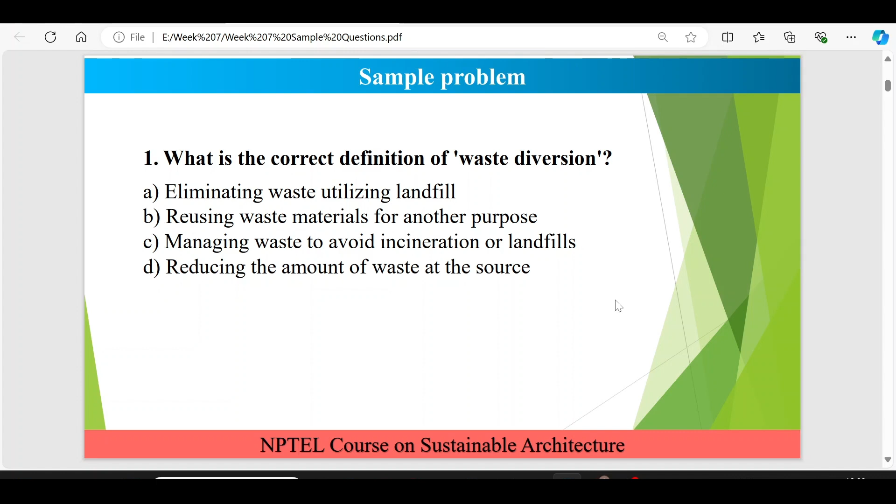Can we move to question number two now? Yes, sir. Here is question number two for all of you: as per the TERI report, by 2047, the waste generation in India is estimated to exceed by how much?

260 million tons per year. Alina is saying 260 million tons per year. Let me note the answers of other students also. Sasidhar is also agreeing with option C. What about others? Try to participate in this problem solving session and give your valuable input in the chat box, whatever answer you think is the most suitable for this question.

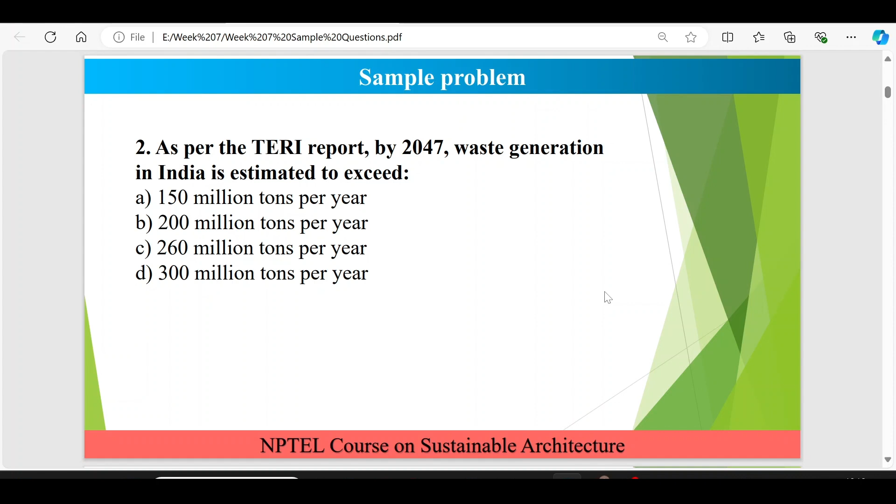Here is question number 3 for all of you: which type of waste is not biodegradable? Out of the four options given to you - food waste, garden trimmings, glass, organic waste - which waste is not biodegradable?

Option C, all of you are absolutely right. Glass is an example of a non-biodegradable material, which means it cannot decompose naturally, or it remains in the environment for a longer time as compared to all other options. So let's move to question number 4.

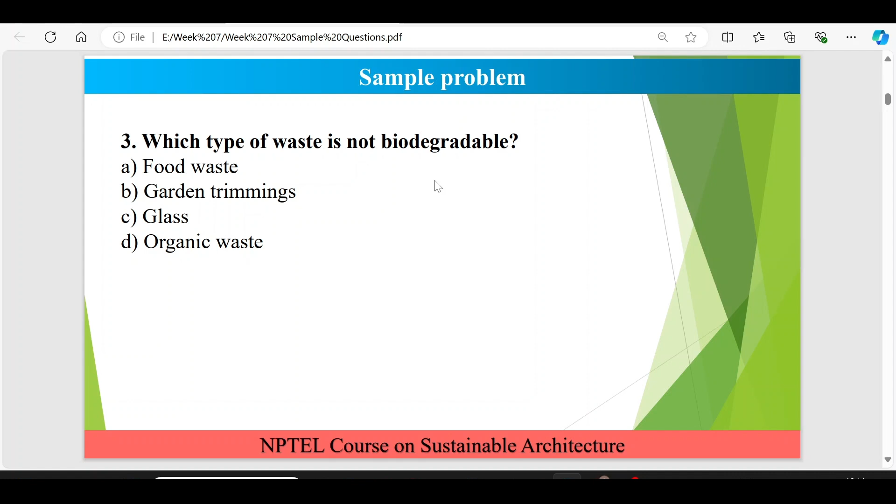Here is question number 4 for all of you: waste disposal involves recycling materials for further use. This statement is true or false? False.

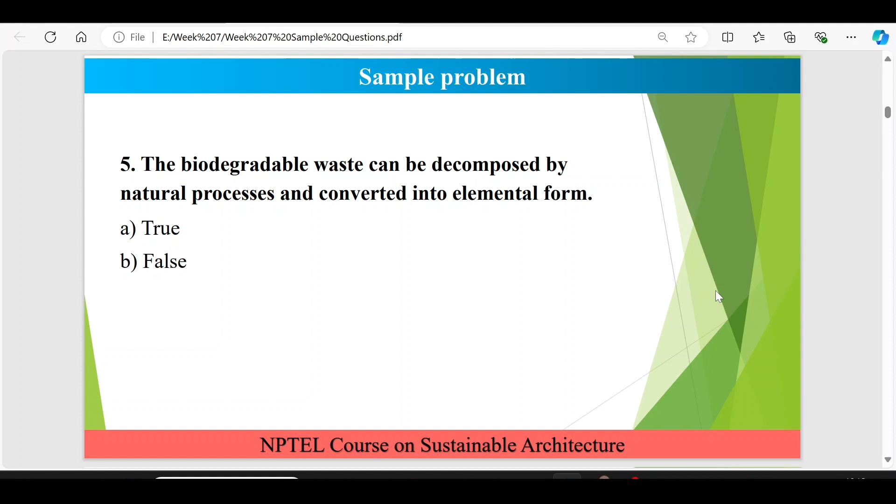Without wasting much of our time, let's move to question number 6 and see how many of you can give answer. Combustible rubbish includes items like metals and glass, true or false? All of you try to participate and give your answers based on the understanding of lecture 31, slide number 7.

Option B, false. How many of you have given answer? Let me see. So most of you have already answered. Option B false is the right answer because combustible rubbish refers to materials that can be burnt, such as paper, cardboard, or clothes, while the metals or glasses stated in the statement are non-combustible materials. That's why it is false.

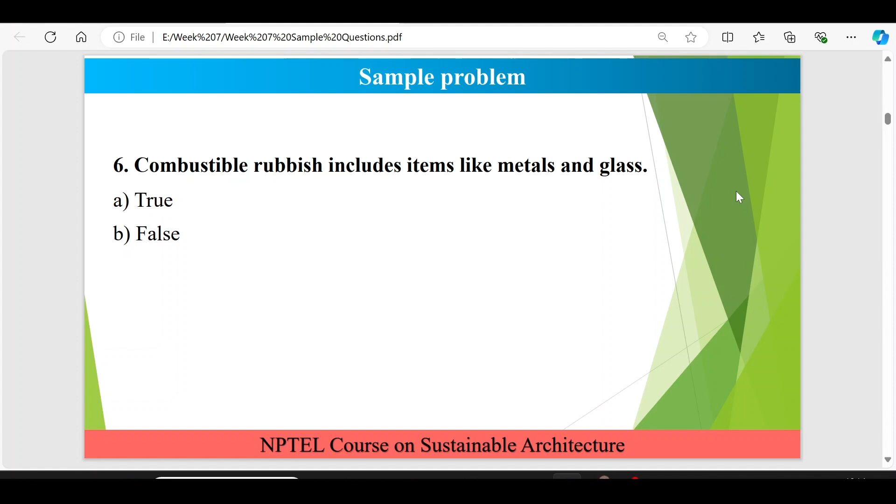All of you are absolutely correct. Let's move to the next question. Question number 7. How much energy is required when recycling aluminum compared to producing virgin material? Is it 50%, 75%, 90 to 95%, or 5 to 10%? I think 5 to 10%.

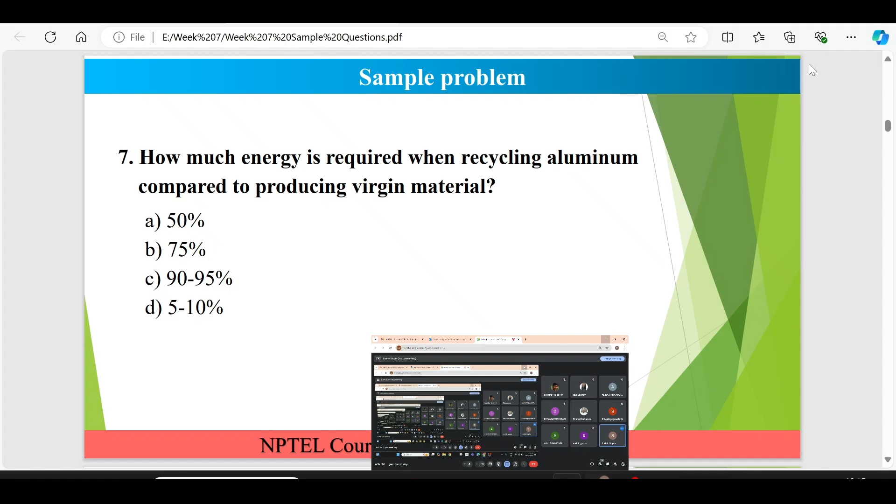Okay, all of you give your answers based on the understanding of lecture 31, then I will discuss the answer. So most of you have given option D. Option D is the right answer: recycling of aluminum requires only 5 to 10% of the energy needed to produce new or virgin aluminum material, highlighting the significant energy savings through recycling of aluminum. Is it clear to all of you now?

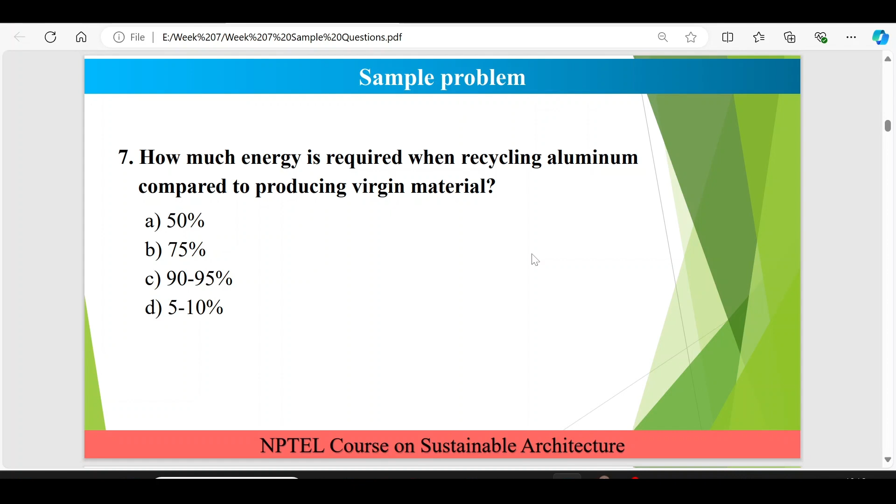Yes, sir. Okay, then let's move to the next question. Question number 8. What is the approximate percentage of India's total landfill waste generated by the metro cities? 17%, or 37%. You can answer based on the understanding of slide number 13 of lecture 31.

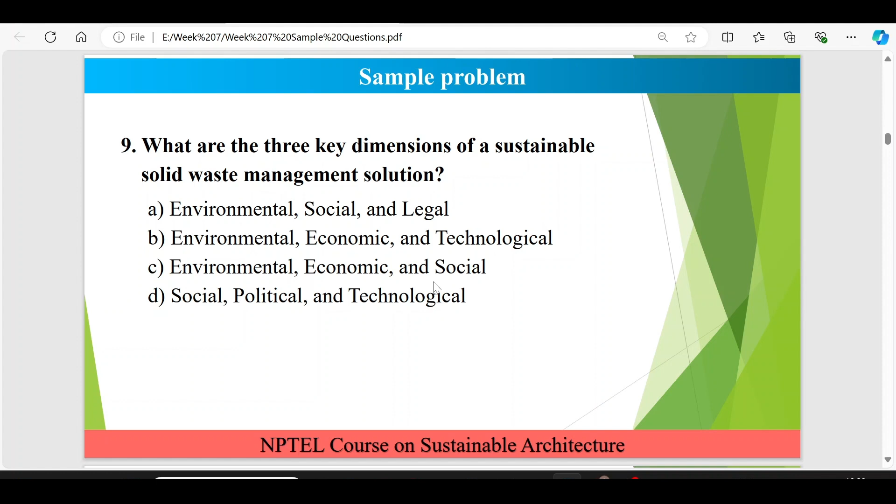Question number 10. Try to give answer to this question also: the recycling of glass requires the same amount of energy as producing new glass. I think true. So what about others? You can refer to slide number 10 of lecture 31. False. So whether it is true or false?

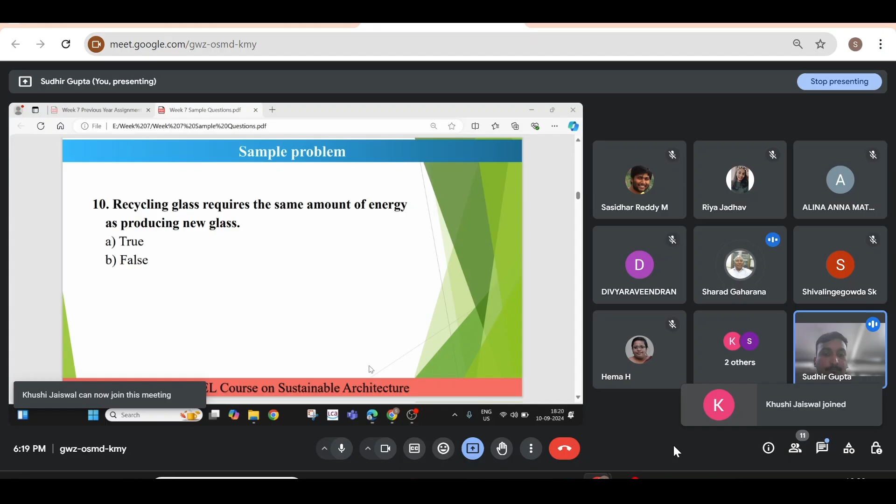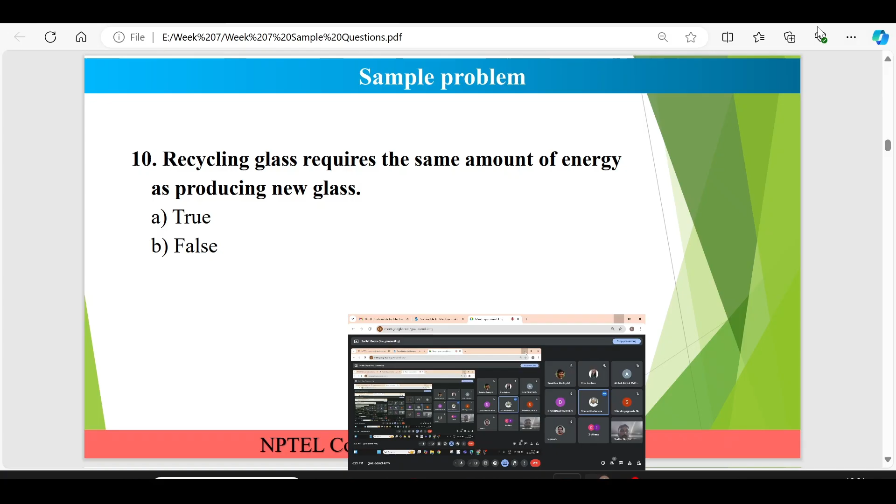So Sasidhar is saying true, but false is the right answer for this question.

When we were discussing aluminum, the discussion about glass was also written. These materials consume around 5 to 10% of the energy required to produce new materials, and both aluminum and glass significantly reduce energy consumption. So this statement is false. Is it clear now?

Yes, sir. Okay, sir. Okay.

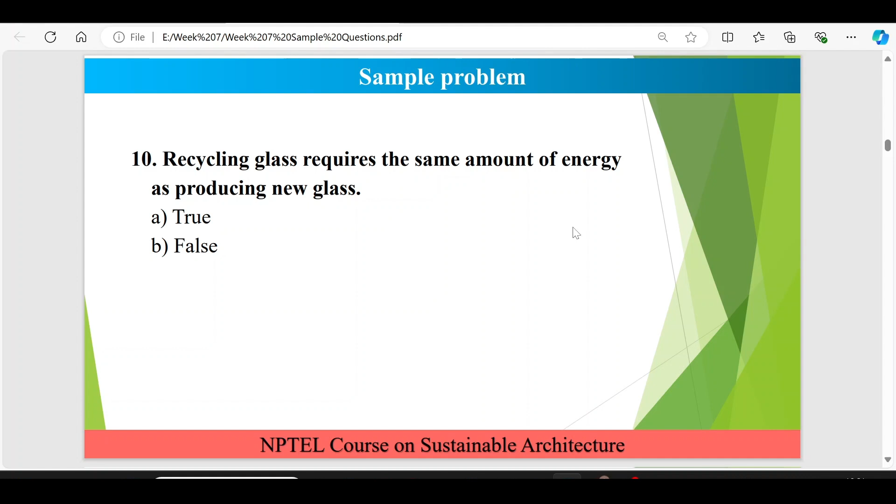So let's move to the questions that can be found from lecture 32, material and resources part 2. Here we will be discussing some questions based on this lecture. Here is the first question from lecture 32. Try to give answer to this question also, like you have given to the previous questions.

Which of the following factors is not considered when selecting technologies for waste management? Option A, origin and quality of the waste. Option B, availability of outlets for produced energy. Option C, color of the waste. And option D, cost of the alternatives.

Let me see how many of you have given the answer. Okay, so all of you have given option C as the right answer. So this option C is the right answer for this question.

As you know, the key factors for selecting waste management technologies include the origin and quality of waste, the presence of hazardous substances, availability of outlets for energy, the market for byproducts like compost, energy prices, cost of alternatives, and experience of technology provider. These are all factors we consider, but there is no relevance to the color of the waste. That's why option C is eliminated out of the four options.

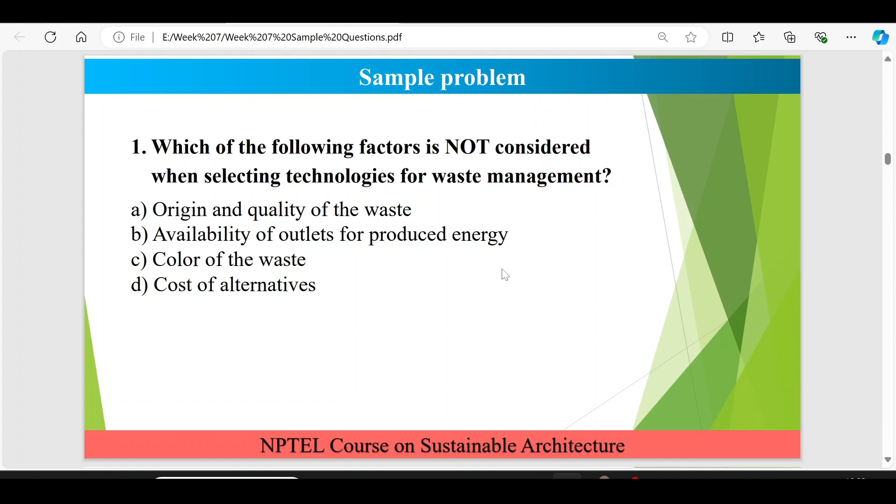So here is the second question for all of you. Which of the following waste management technologies generates the highest energy output out of the four options: paper recycling, incineration, vermicomposting, and composting?

So all of you give your answers. Okay, so all of you have given the right answer. B is the right answer for this question, that is incineration.

So all of you are right. I think we can move to the next question, that is question number 3.

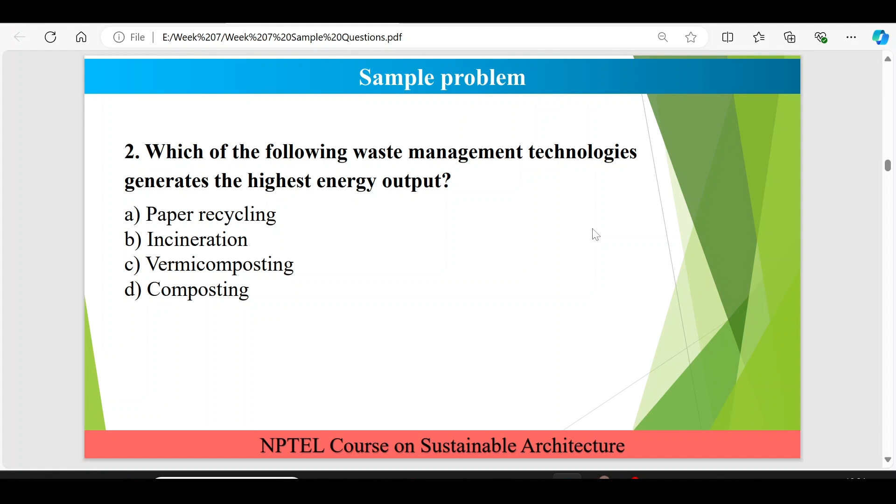What is the key advantage of vermicomposting over traditional composting methodologies? It produces no odor, it takes less time than composting, it requires no maintenance, or it requires more space than composting.

Out of the four, you have to find out the key advantage of vermicomposting over traditional composting. Option C, sir.

Okay, let me wait for others to answer. I think D. Yeah, so Sharad ji is absolutely right. Option B is the right answer.

That is, vermicomposting generally takes less time than traditional composting. Although both methods produce odor, they require significant maintenance, and vermicomposting is more compact. That's why option D is also eliminated. So option B is the right answer for this question.

Question number 3, is it fine for all of you? Yes, sir. Okay.

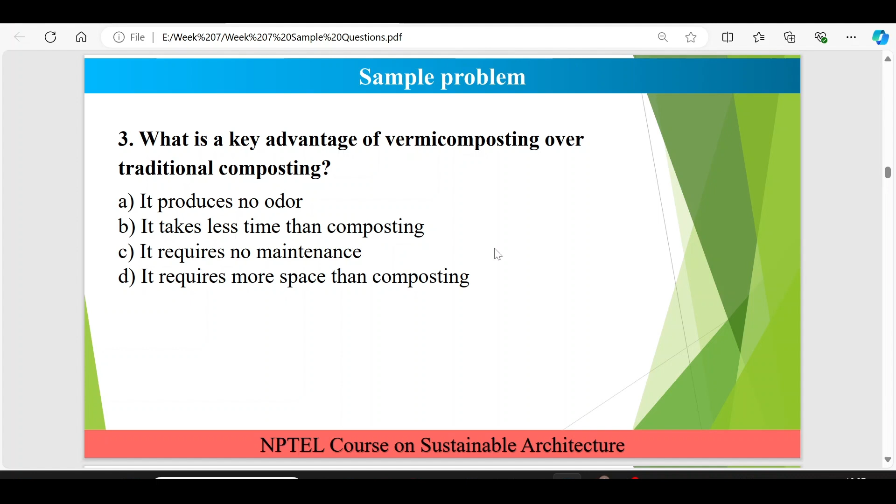So here is question number 4 for all of you. Try to give answer to this question also.

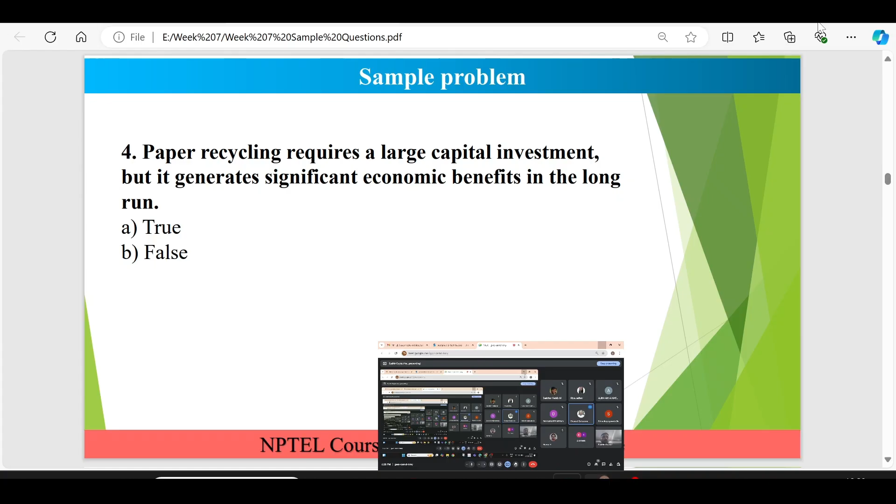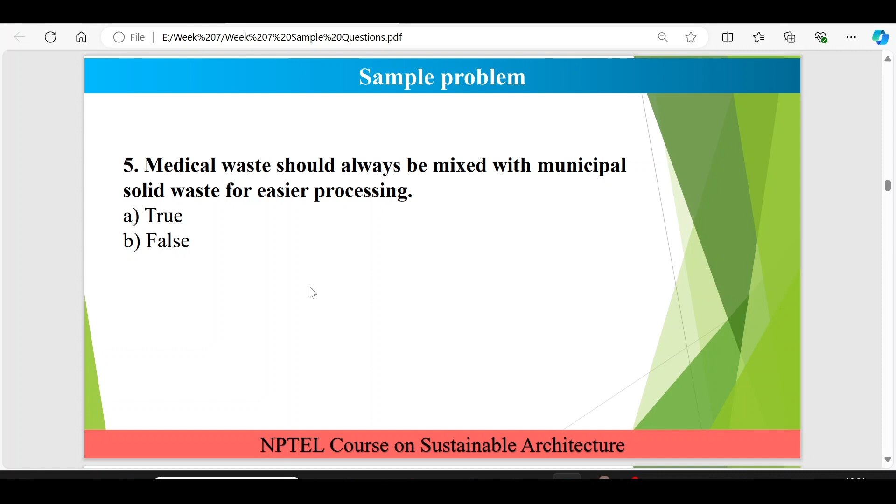Question number 6. Here is question number 6 for you. It is an objective question: which of the following methods is used to treat hazardous waste before storing it in perpetual storage?

Chemical treatment. Option D, sir. Option D. So Alina is saying option D.

Okay, so most of you have already answered. That is fine. Option D is the right answer for this question. According to the content of the waste, hazardous waste can be treated using thermal, chemical, or incineration methods before storing it in perpetual storage, such as landfills or salt formations. All of you have marked option D, that is the right answer. All of the above will be the answer for question number 6.

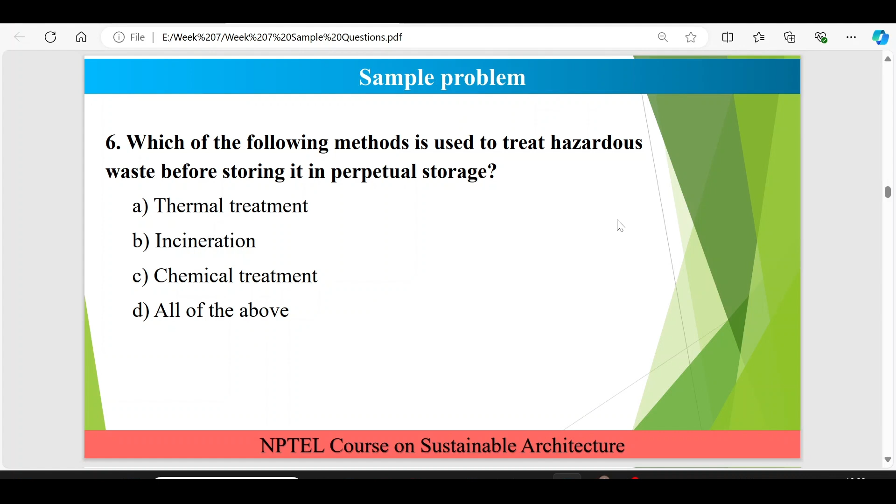Let's move to the next question. Question number 7. Here is the question: what is the method used for sealing nuclear waste? Out of the four options - landfill disposal, deep well disposal, incineration, and chemical treatment.

Okay, some of you are saying D, some of you are saying B, and most of you are going with option B. Good participants are there today. So option B is the right answer for this question.

Deep well disposal is used for hazardous waste, including nuclear waste which was asked in the question, where it is pumped into deep wells, properly sealed, and can be retrieved if necessary. These nuclear wastes are themselves kind of chemicals, so chemical treatment will not be the suitable answer. The most suitable answer will be deep well disposal, as all of you or most of you have marked it. So is it fine for all of you? Question number 7.

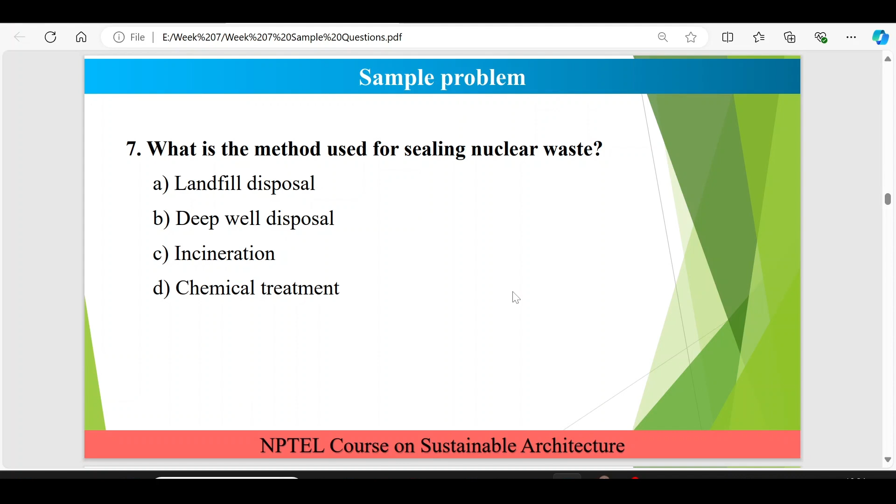Yes, sir. Yes, sir. Okay. Okay, sir. Okay, then let's move to the next question. Question number 8 of lecture 32. Here is question number 8 of lecture 32.

According to the green building rating system, what is the priority in managing construction waste, or the topmost criteria for managing construction waste?

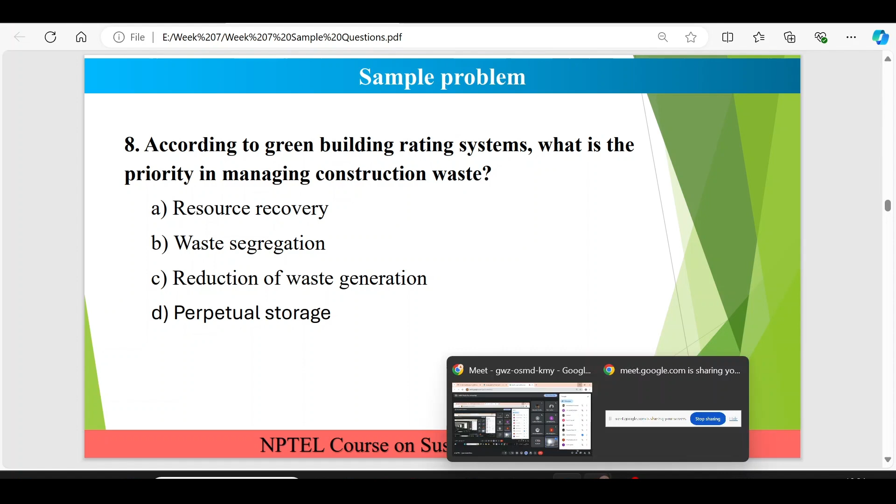Okay, so again, most of you have answered C except Sivalinga, answering D. For question number 8, C is the right answer as most of you have answered. In the initial discussion on sustainable waste management, we discussed the primary or first level of managing waste is reduction, or 3R - reduce, reuse, recycle. In that also we discussed first priority is to reduce waste generation, and that is written in option C, that it is the primary one. Is it clear?

Yes, sir. Okay, then let's move and revise next question. Question number 9. Here's question number 9 for all of you. Green building rating systems mandate the segregation of waste on site to ensure efficient recycling and disposal.

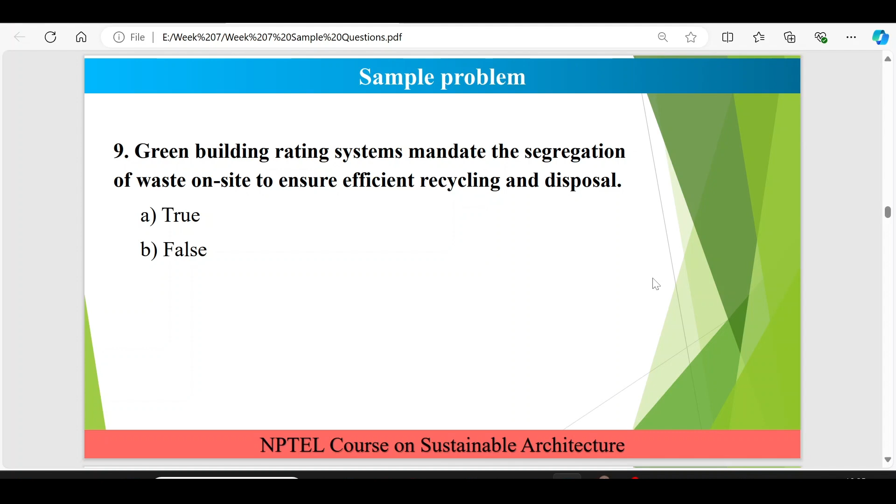Okay, so all of you have given the right answer. This statement is absolutely correct. That is, green building systems require efficient segregation of waste on site to maximize recycling and resource recovery, which also provides proper storage and disposal methods. This is well explained in slide 19 of lecture 32.

Let's move to the next question, question number 10. Here is question number 10 for all of you. Sending food waste to fisheries is an example of waste to energy technology. Is it true or false? I think true.

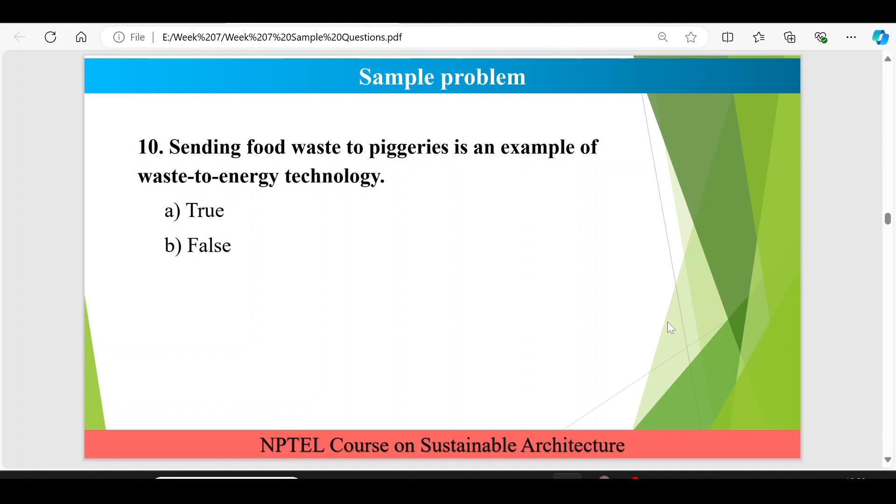So let's move to the next question. Here is the next question for all of you, based on the third lecture, lecture 33, Material and Resources Part 3 of this week 7 course. Here is the first question of lecture 33. Similarly, we will be having 10 questions from each of the lectures of this week's content. Two weeks of content we have finished, and we have solved around 20 questions. Now these questions will be based on the third lecture of week 7, and here also we will practice 10 sample questions that can be formed with this content of week 7 lecture three. Here is the first question for that.

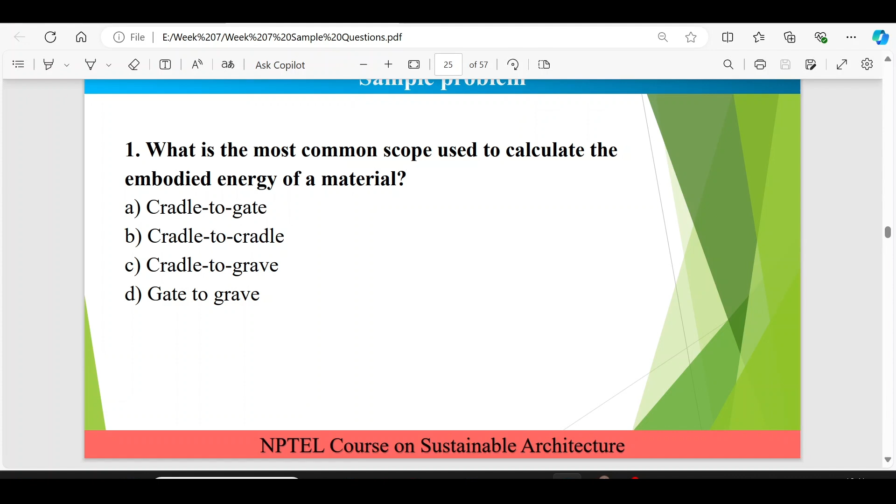What is the most common scope used to calculate the embodied energy of a material? From the definition of embodied energy, you can answer this question, which was discussed in slide two of this week's lecture 33. If you understand well the embodied energy definition, then you can answer this question, because what is cradle to grave was also discussed in the previous lectures.

So what will be the right answer for this question? Question number one. All of you? C, sir. Okay, C. So one of you is saying C. What about others? Okay, so three of you are saying C. Alumina is also saying C. Fine.

So C is the right answer for this question, that is cradle to grave. It includes the cradle to grave, the full life cycle of the material, from raw material extraction to its disposal, and it is the most used scope to calculate the embodied energy. So option C is the right answer for the first question of lecture 33. Everybody is fine with the answer?

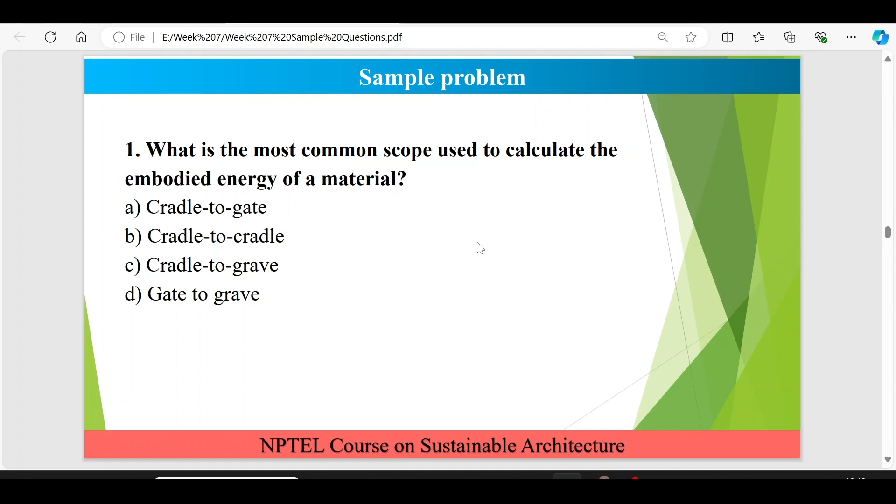So most of you, all of you, have given option B, so B is the right answer. That is, according to NBC, aluminum falls into the category of very high energy intensive materials. And in slide 4, you can see the list was given to you, and they are with energy intensity greater than 50 gigajoule per ton, given to the aluminum materials.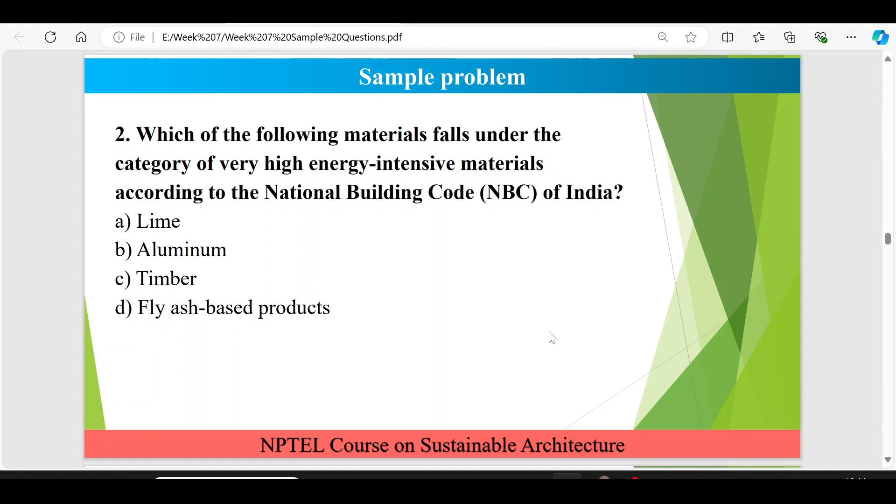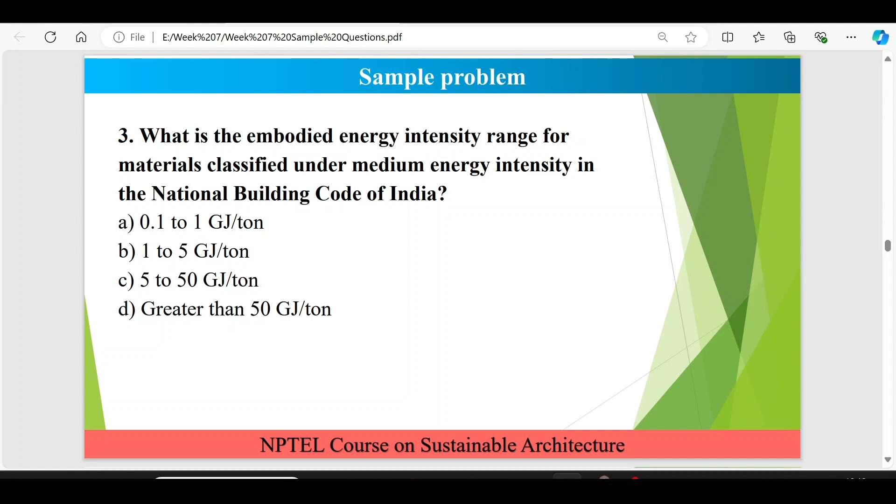Okay, so all of you are right that the range is 1 to 5 gigajoule per ton. It is the range for the medium energy intensive materials. Can you give examples of some medium energy intensive materials? Lime, lime, brick, clay, yeah. Some more: gypsum, plasterboard, timber, concrete blocks also come under medium only. Okay, so let's move to the next question.

Question 4, here is question number 4. The process of building reuse is only applicable to new constructions, not to existing buildings. Is this true or false?

False. So four of you have said false out of 11.

I want all of you to give your answers based on your understanding of the lecture videos, so we can make it interactive and discuss the answers if you are going in the wrong direction. Here is the question again, showing for the rest of you who have not given the answer.

False is the right answer for this question. Building reuse is relevant for existing buildings also that are undergoing renovations or major additions. So saying that it is not relevant to existing buildings is absolutely wrong, that's why it is false. Here is question number 5.

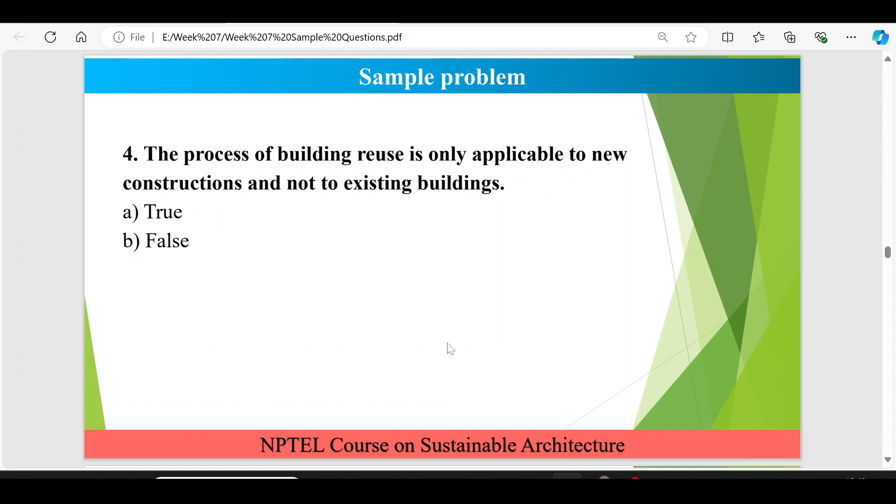Which of the following is a compliance criteria for the reuse of non-structural elements in sustainable architecture? Whether 75% of the structural elements must be used, or 50% of the structural elements must be used, or 50% of the non-structural elements must be used, or option D, 25% of the structural elements must be used.

Compliance criteria for reuse of non-structural elements. So C and D. B is not the right answer at all because we are talking about non-structural elements, compliance criteria for the reuse of non-structural elements, not about structural elements. So B cannot be the answer.

Out of C and D, you have to choose whether 25% of the non-structural elements must be used, or 50% of the non-structural elements must be reused. Out of the two, which is the right answer? All of you choose your answers in the chat box for question number five.

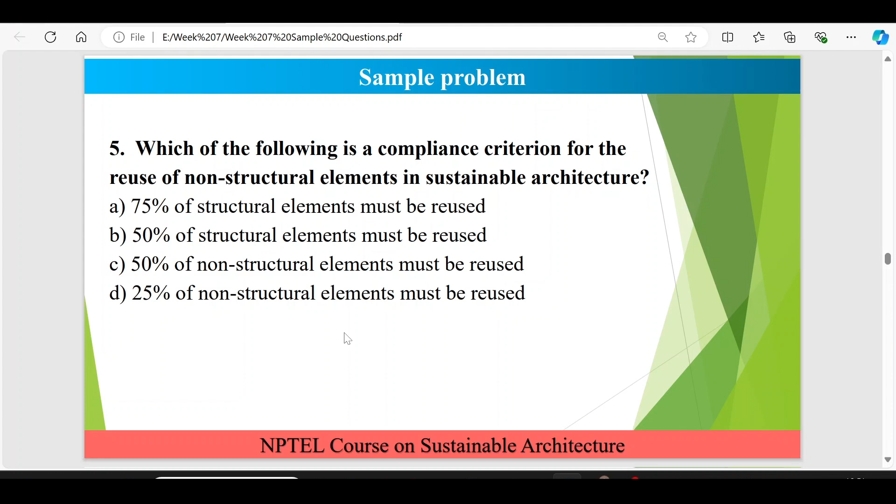Okay, so can we move to the next question? Question number six. Yes sir, yes sir, okay. Here is question number six from lecture 33, slide number 22.

What is the minimum percentage of material cost that must come from salvaged, refurbished, or reused materials in a project? It is talking about the material cost.

You can refer to slide 22 also and try to give the answer to this question, question number six from lecture number 33. Is it 5%, 10%, 15%, or 20%?

Okay, so all of you are going in the right direction, that is option A. At least 5% of the total material cost in a project must come from salvaged, refurbished, or reused material to comply with the sustainability criteria. This was discussed in the lecture videos, so option A will be the right answer, and all of you have given the right answer. Let's move to the next question, question number 7.

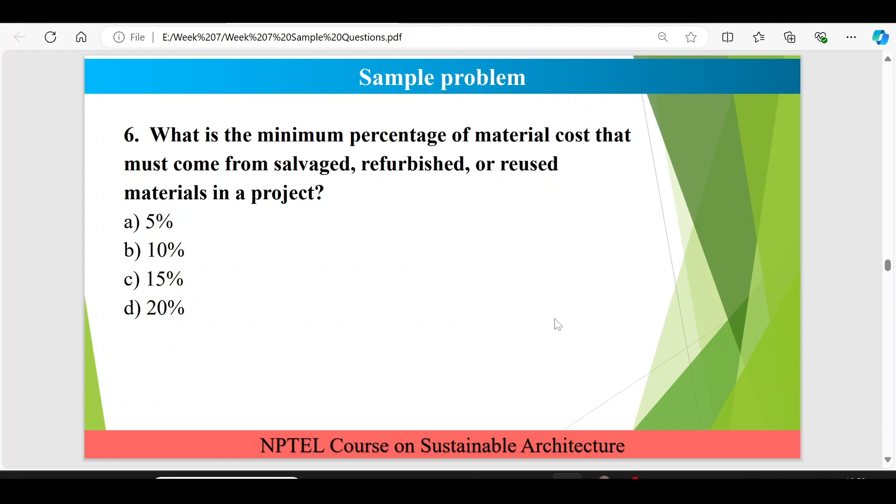Here is question number 7. Which of the following is not an example of non-structural elements that can be reused?

This discussion I was doing in the previous questions, what structural elements we can reuse. So out of the four, which is not an example of non-structural elements that can be reused? Doors, load-bearing walls, partition walls, false ceilings. B, load bearing walls, B, load-bearing walls.

So most of you are going with option D, false ceilings. This time Sivalinga is absolutely right, option B, load bearing walls, is the right answer for question number 7, because we are talking about which is not an example of non-structural element. So load bearing walls come under structural elements.

While the other options that I have mentioned, like doors, walls, false ceilings, these are examples of non-structural elements that can be reused. So I hope for now it is clear, option B is the right answer, not option D. Okay, yes sir, double negative. Is it fine? Yeah, okay.

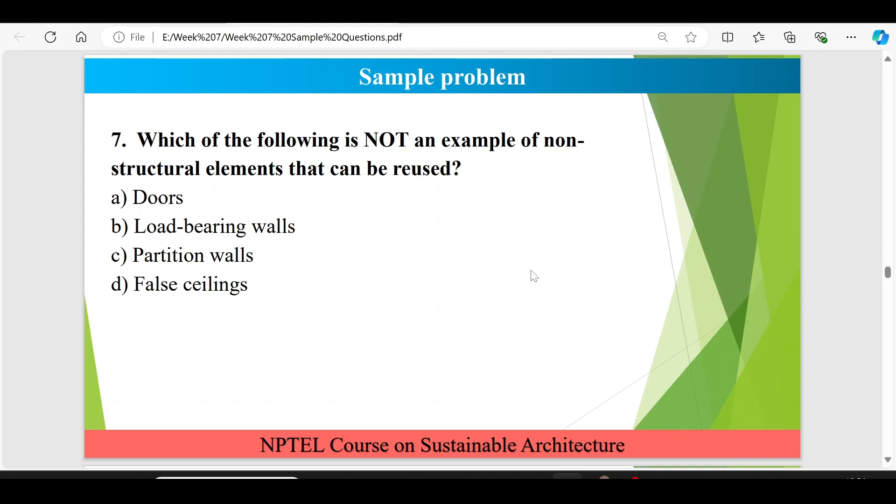So thank you for your participation, let's move to the next question, question number 8. This is question number 8 from lecture 33.

The cost of salvaging material is always lower than procuring new materials.

Okay, I will give a mix of answers. You can refer to slide 22 of lecture 33. In slide number 22, it was discussed that in some cases, the cost of salvaging materials, such as wood flooring, may be higher than procuring new materials. Was that discussed?

Yeah, some explanation was given, but we couldn't relate it. This statement is talking about the cost of salvaging material always being lower. You can see the statement again. It says in no cases will the cost be higher - in all cases, the cost of salvaging materials will be lower than procuring new materials.

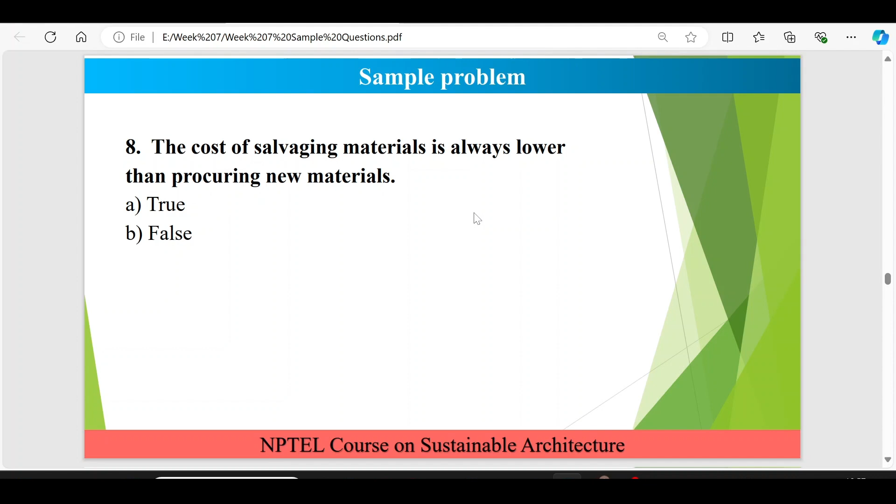Yes, sir. Okay, here is question number 9. Try to give an answer to this question also. The reuse of materials in sustainable construction is measured by their total area rather than total cost. So whether this statement is true or false, out of all the participants...

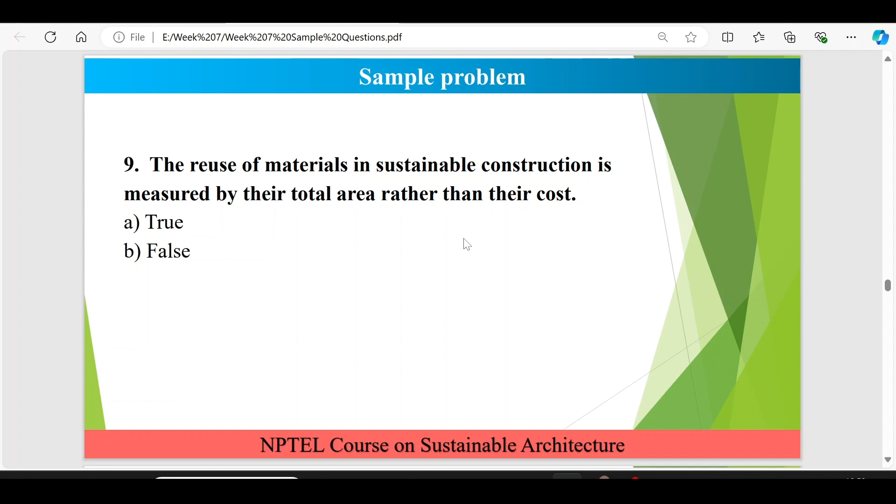So this is the last question of lecture 33. Then we will be moving to questions, some simple problems based on the content of lecture 34, material and resources part 4. Try to give the answer to this question, then we will move to the next questions based on lecture 34.

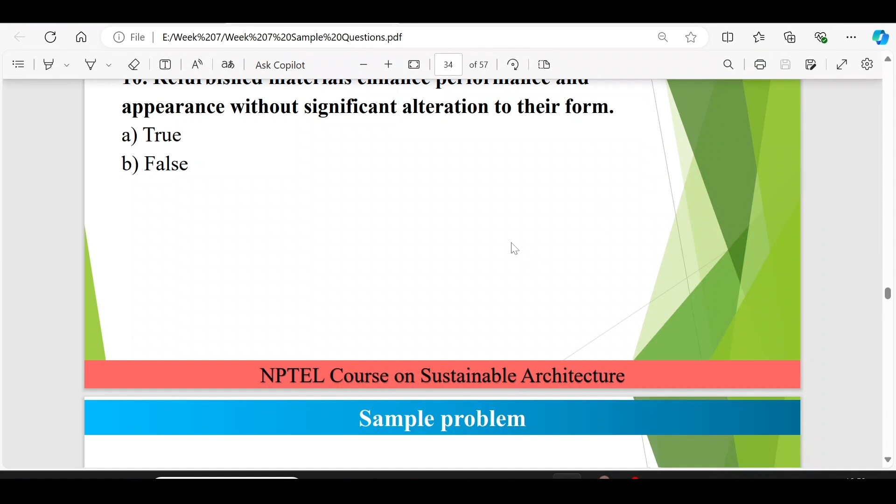Okay, so Saralji, Elena, all of you have given the answer. So all of you are right. This statement is absolutely true - that refurbished materials are those that have been reused without significant alteration, but they have undergone enhancement in their performance, appearance, or functionality. This was discussed.

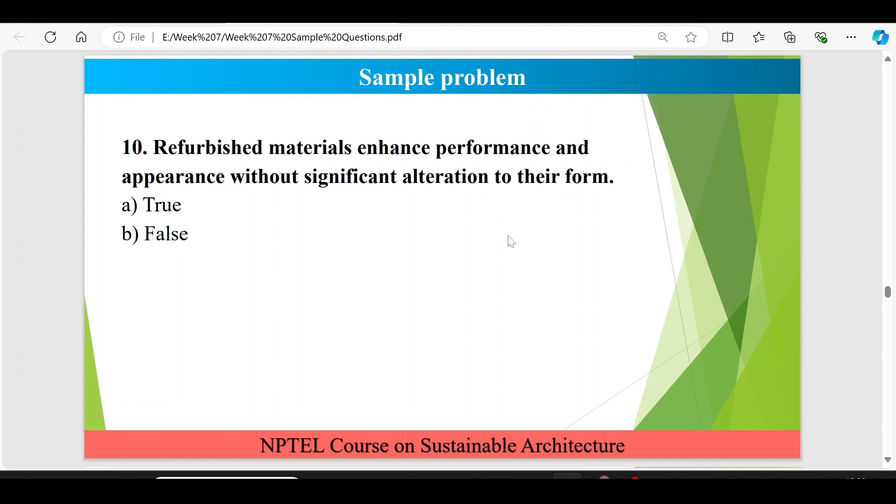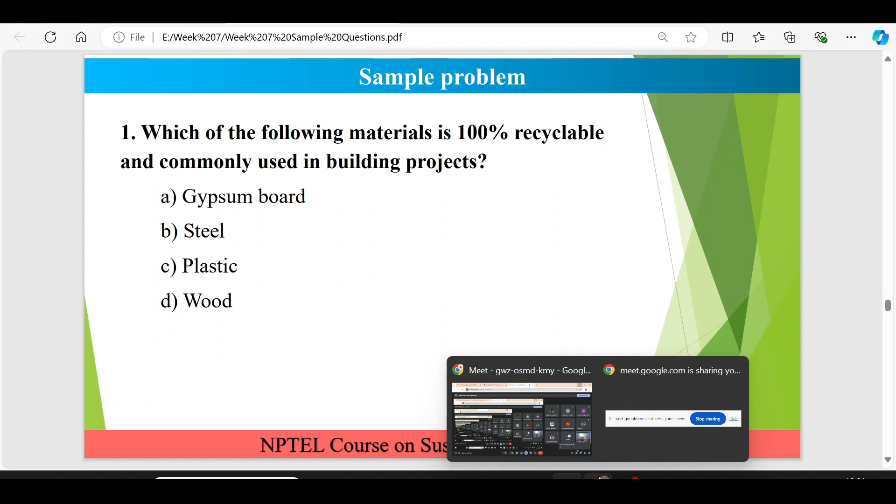So whether it is gypsum board, steel, plastic, or wood - which is 100%, or approximately 100%, recyclable, and also commonly used in building construction or building projects. Let me see how many of you have given the answer till now for this question.

Okay, so B. What about Elena? So I don't know the answer.

Okay, it's fine. As you can see, some hints are already given in the question. You can also refer to slide 6 of this lecture 34, where a flow diagram was given showing the building material commonly used in building projects. So which material out of these four is commonly used? Like plastic - it is less commonly used. Another thing is which can be recycled easily.

So plastic cannot be recycled easily as compared to others, so you can eliminate this. Gypsum board you can eliminate too. So as the rest of you have answered, steel will be the most appropriate answer, noted to be approximately 100% recyclable, making it a sustainable option in construction projects. Try to eliminate some options, then out of the two or three left you can choose the most suitable one.

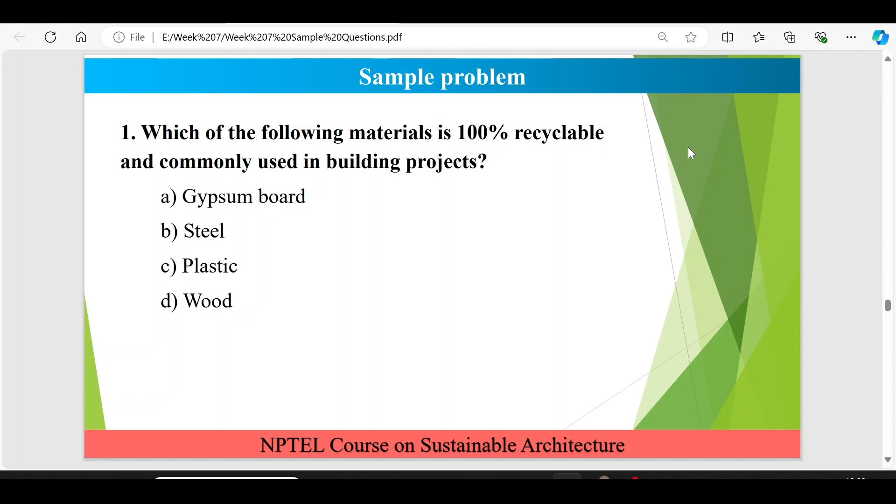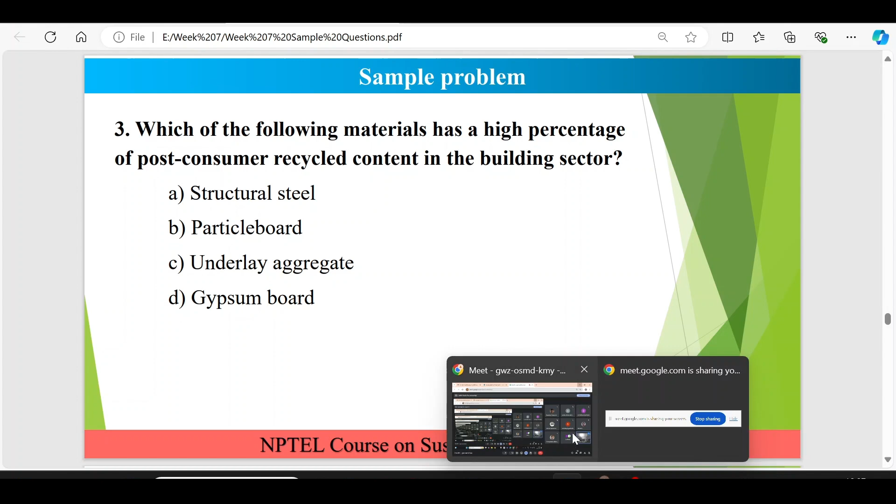So A is the right answer, and I think most of you, or all of you who have answered, are saying A. So, as we discussed in the first question, structural steel is noted to have both high post-consumer and pre-consumer recycled content out of the other three options given. So everybody is fine with option A.

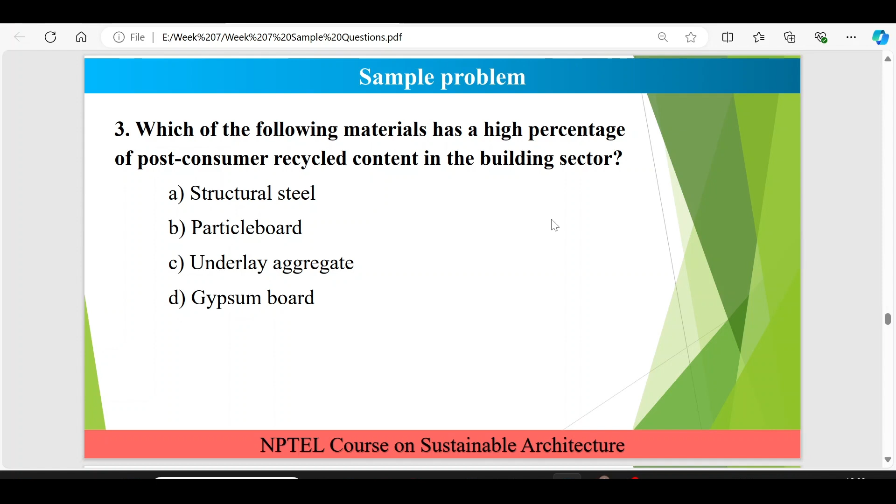Yes, sir. Okay, so let's move to the next question, question number 4 of lecture 34.

All recycled materials maintain the same quality and durability as virgin materials. Is it true or false? False. So this is false, because it is talking about all recycled materials. You can give the example of many recycled materials such as plastic that may not have the same durability or quality as the original new materials. So after recycling, it is not necessary that all materials maintain the same quality and durability. So false will be the right answer. All of you are absolutely right.

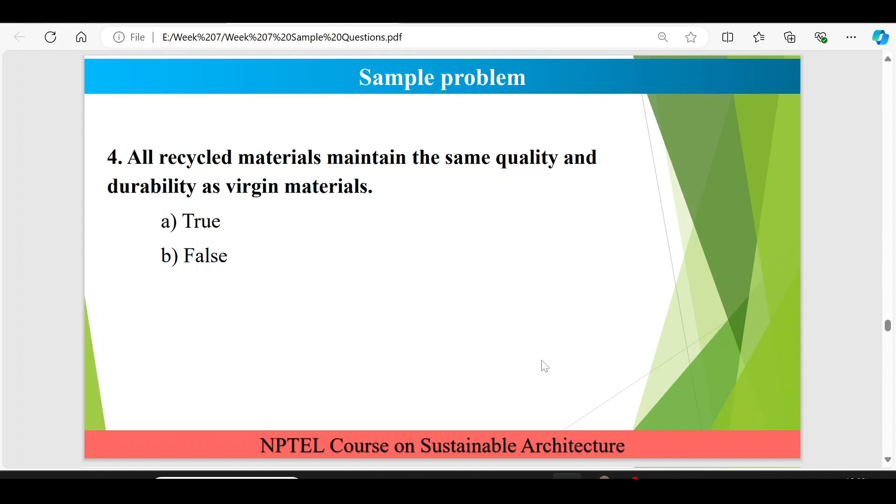So let's move to question number 5, and let's see how far you have understood life cycle analysis and recycling, and whether you are able to correlate both. This will be tested in question number 5. Here is question number 5 for all of you: what type of life cycle does steel have in terms of recycling?

If you understood the different life cycle analyses, that is cradle to gate, cradle to grave, cradle to cradle, you can easily answer these questions. When working with steel, what type of life cycle does it have? I'm talking about life cycle analysis. Which life cycle analysis will you be performing for steel out of the different ones you have studied, whether it's cradle to gate, cradle to grave, cradle to cradle, gate to gate, or other types? So let me see how many of you are fine with this.

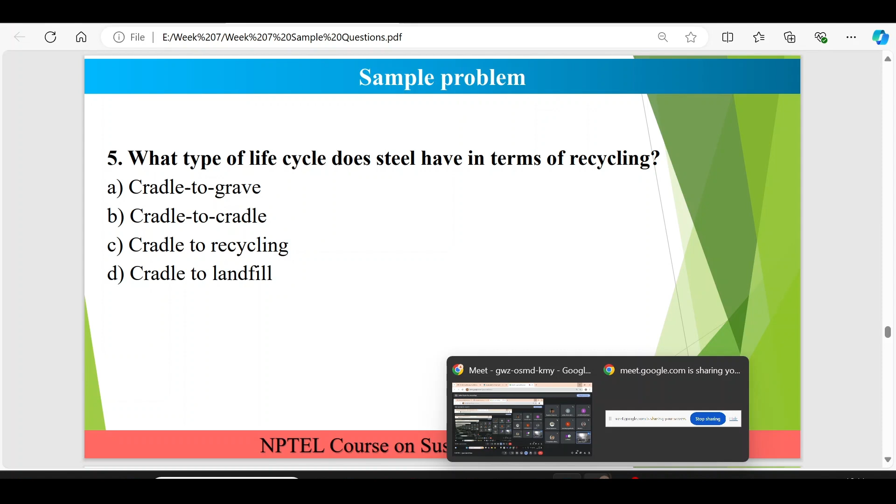So Elena is saying option B. Out of B and C, which will be the most suitable one? What do you understand by cradle to cradle, and what about cradle to recycling, this kind of life cycle study? I don't know whether that life cycle exists; I haven't heard of it till today. But cradle to cradle is actually having recycling inbuilt.

That's right. So when you are talking about life cycle analysis, there is cradle to cradle, cradle to landfill, or cradle to recycling. These options can be eliminated because cradle to recycling doesn't speak about any particular life cycle analysis process, since different life cycle analysis processes are involved and it's not particularly about recycling of steel only. When we talk generally, the different life cycle analyses that can be performed, as discussed, are cradle to gate, cradle to grave, cradle to cradle - all these were there. But cradle to recycling is not the kind of life cycle analysis we generally perform.

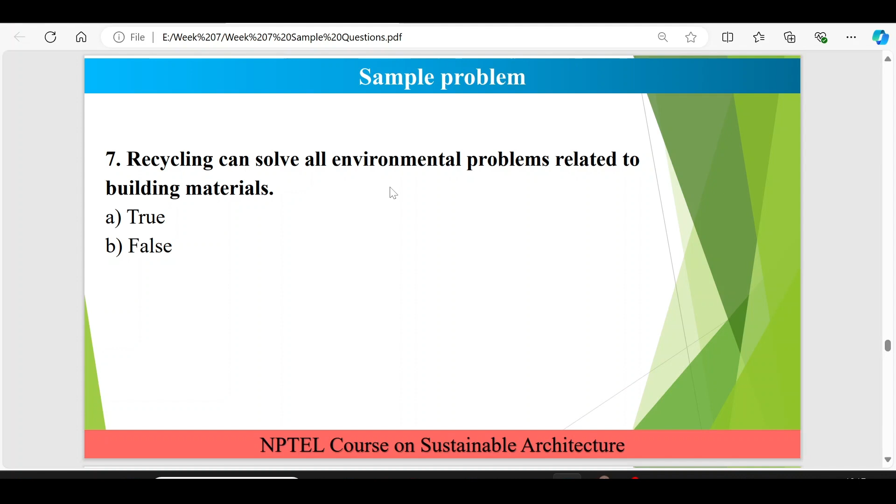So let's move to the next question. If you are listening to the explanations well, I think it will be beneficial for you for some of the questions, like it happened in this question. So here is question number 9.

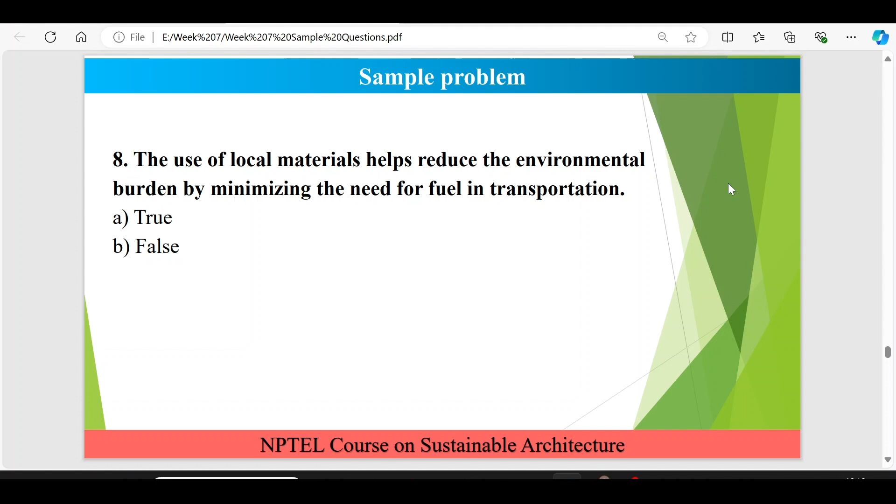False. So you are able to see the slides, or based on the understanding of the lectures, you are giving the answer.

Based on the slide. So in which slide is it explained? Slide 26. Whoever answered true for question 9 can see it is discussed that compliance typically requires 10 to 20% of the total material value to be locally sourced, depending on the rating program. So the statement of procuring around 50% of materials to be locally sourced is false. Is it clear now? Yes, sir.

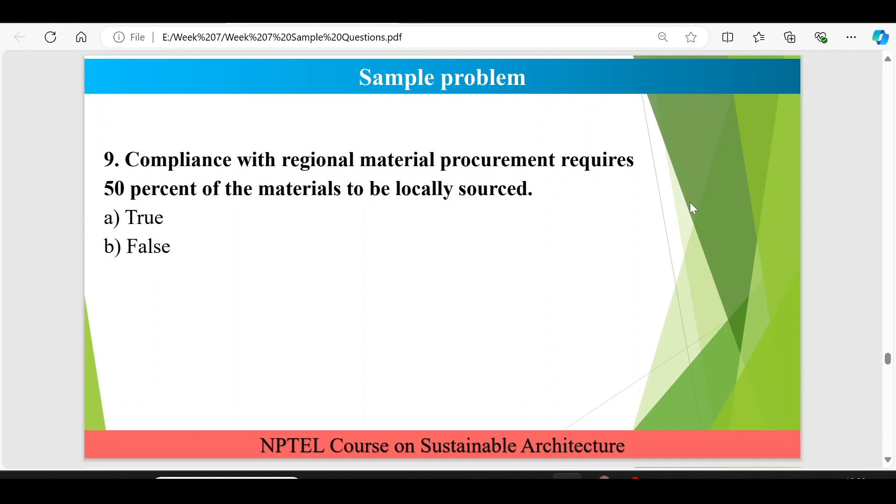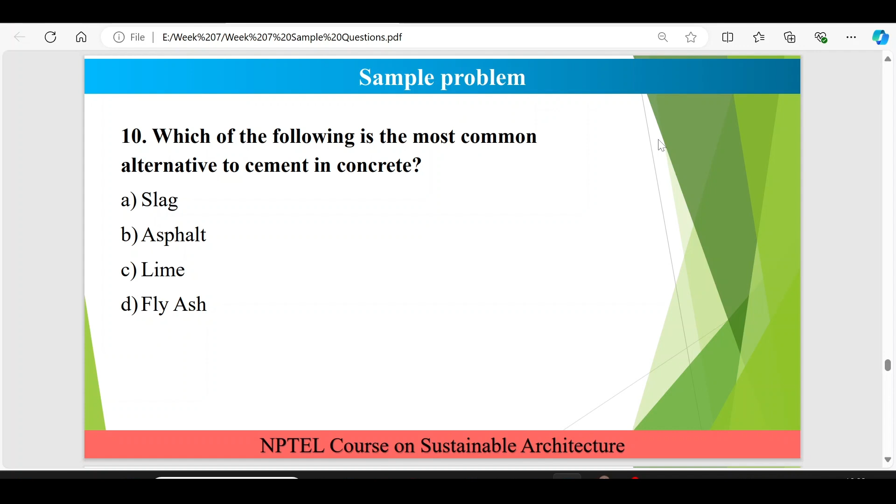Okay, let's move to some sample problems of lecture 35, materials and resources part 5 of week 7. This will be the last lecture of sample problems for week 7. We will similarly discuss 10 questions that can be formed from the content of this lecture, and after that we will discuss the previous year questions.

There are also 10 previous year questions. Based on all the videos you have seen, you have now submitted the assignment also, I feel. This is a quick revision session where you are solving and understanding multiple concepts, doing revision of the lecture videos. After that I will discuss the previous year questions, and I am hoping all of you give correct answers for all 10 of them.

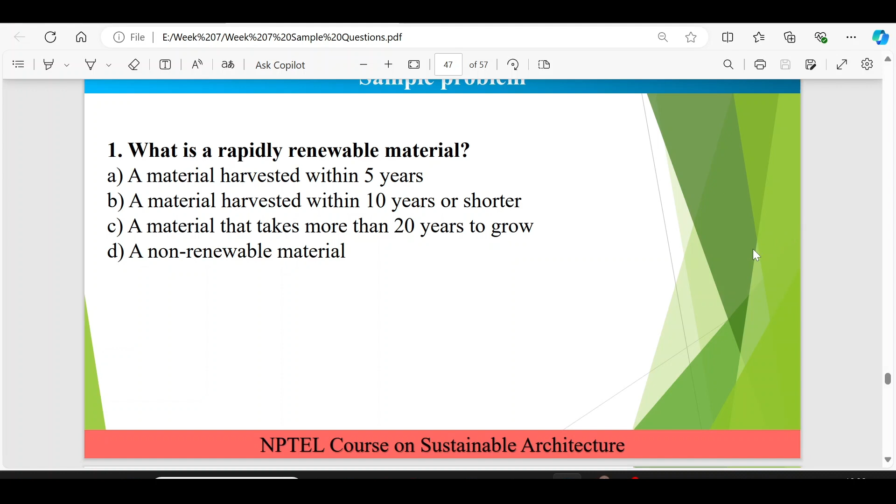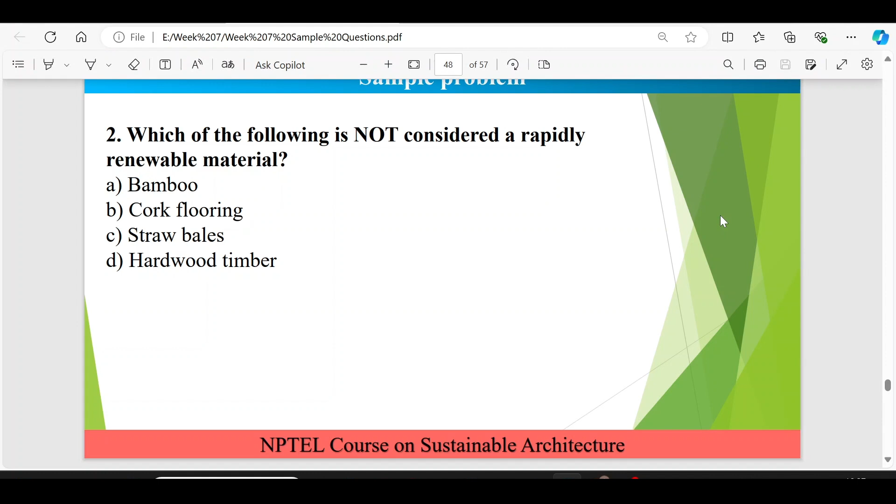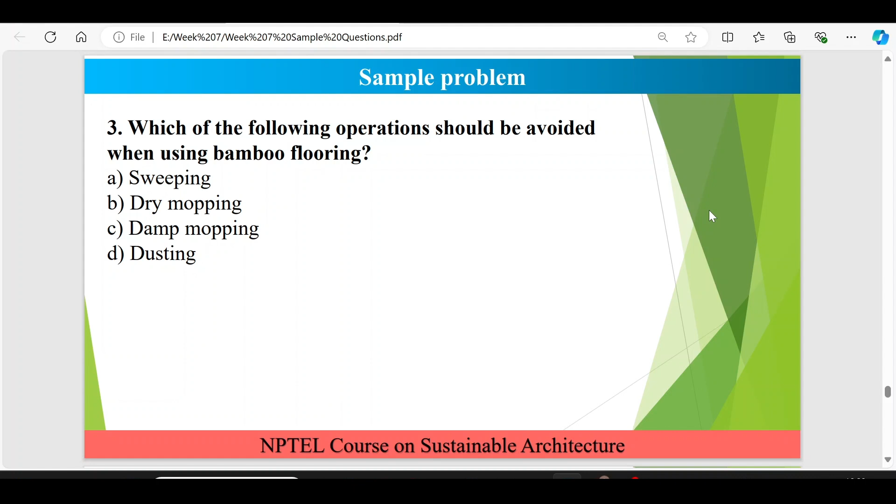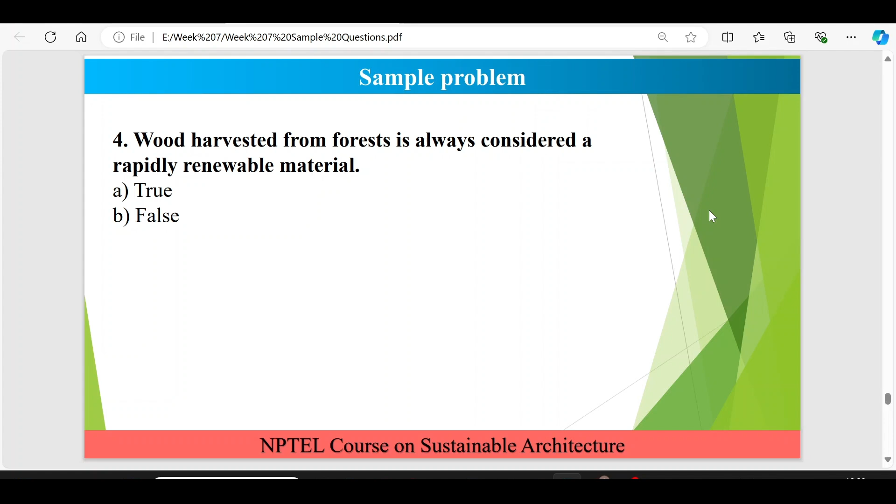As we have discussed the above three questions, you can answer this very fast and easily. Elena and Bling have already given the answer that this statement is false, because wood is renewable, but it is not necessary for it to be a rapidly renewable material unless it is harvested within the 10-year cycle. That was the definition of rapidly renewable material. We can also harvest hardwood timber from forest that takes 20 to 25 years to grow, as I have discussed, so it will be renewable, not rapidly renewable. That's why this statement is false.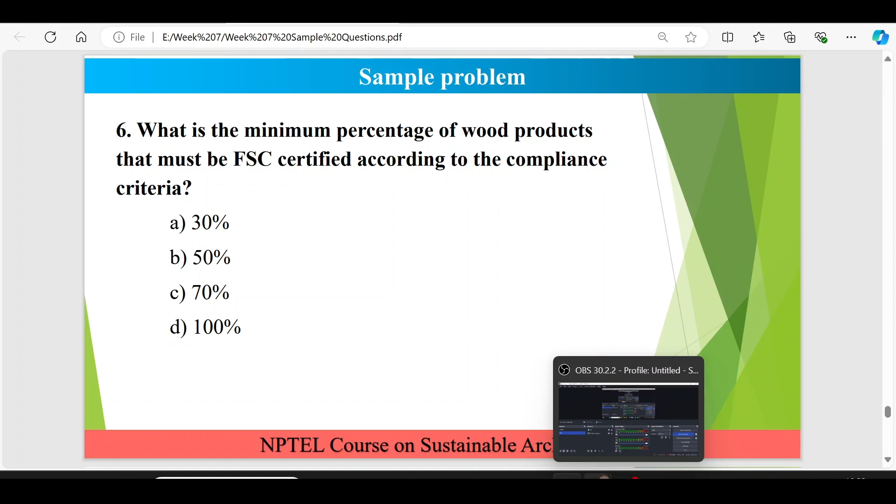Okay, again three of you have answered. What about others? Divya, Hema? Okay, so B is the right answer, and all of you know that the compliance criteria require at least 50% of the total wood waste materials used on site as per FSC certification. So everybody is fine with option B, 50%. Yes, sir. Okay, then let's move to the next question.

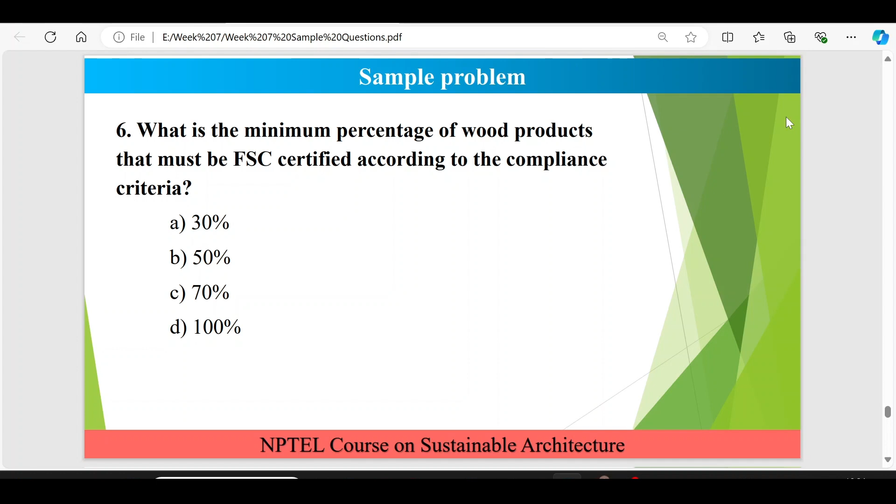Question number 7. Which of the following is not a consideration when selecting materials for green buildings? Out of the four options, which is not a consideration? I hope this question is clear to all of you, and all of you will give the correct answer. This was discussed in slide 23 of lecture 35.

So out of the four, which is the least consideration when selecting materials for green buildings? Aesthetics is the right answer, and I hope all of you have given the right answer - option C. Aesthetic appeal, although important, is not listed as a key criteria for selecting materials in green buildings. Durability, local availability, and energy performance are the critical factors. That's why option C is the right answer for this question.

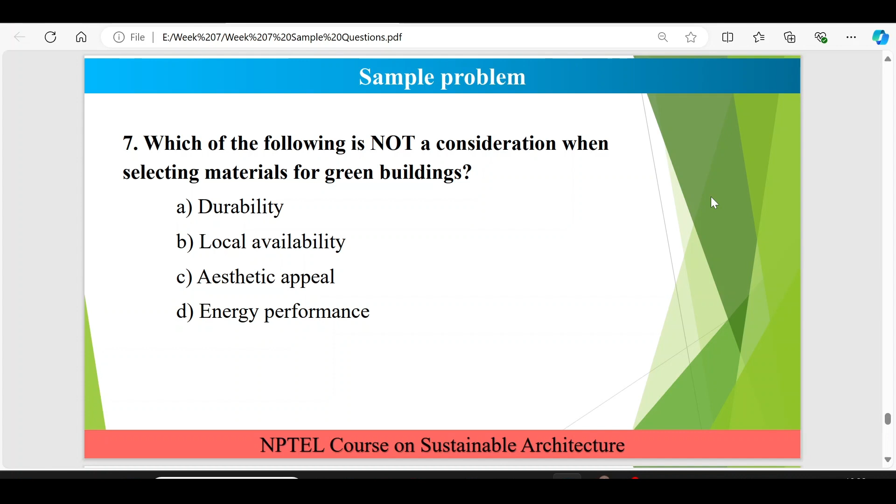Let's move to question number 8 and C. I think for this one, most of you will be able to answer easily. Question number 8, we are talking about FSC certification. What does FSC stand for? Forest Stewardship Council. Okay, what about others? Yes sir, option A, everybody is fine. So Forest Stewardship Council is the right answer, and this is the full form of FSC. Noted, let's move to the next question.

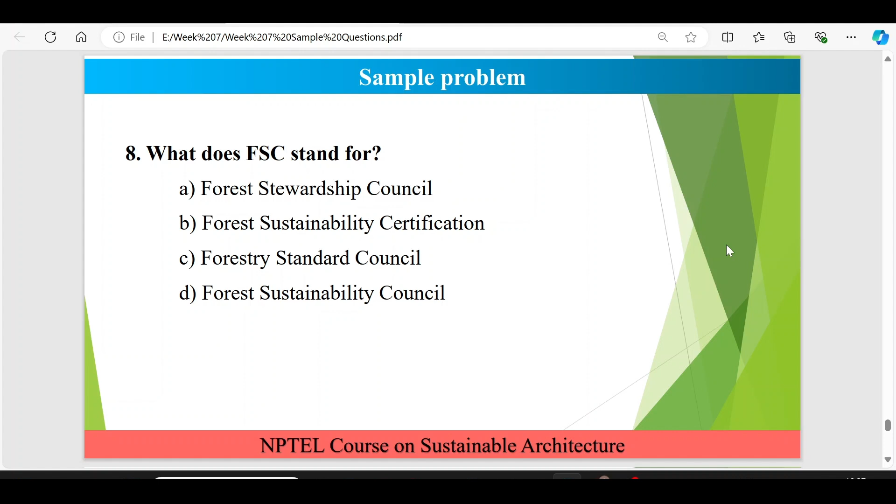Question number 9. FSC certified wood products are always less expensive than conventional wood products. Is it true or false? All of you try to read this question again and answer. Give your answers for question number 9. For people who are not able to recall, refer to slide number 16 of lecture 35 and try to answer whether it is true or false.

Okay, Lina is now saying false. What about others - whether this statement is true or false? False, false, yeah. So these FSC certified wood products are generally more expensive, so saying it is less expensive is false. Why are they more expensive? They are more expensive generally because of the sustainable forest management practices involved during the extraction of these FSC certified wood products, which makes them more expensive compared to conventional wood products. So everybody is fine with the answer - it is false.

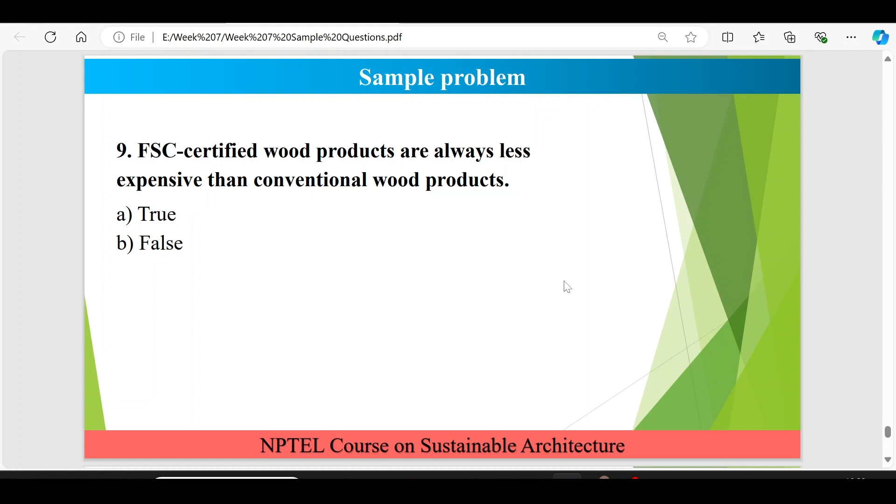Yes sir. Okay, so here is the last question of the sample paper, question number 10. When calculating FSC certification compliance, the value of the entire assembly, including the non-wood component, is considered. Whether this is true or false. People can also refer to slide number 21 for further information regarding FSC certification compliance - which components are considered and which are not. Give me the final answer in the chat box for this last question of today's sample problems. Then we will move to the previous year questions, the last 10 questions, which are the most important ones you will be answering.

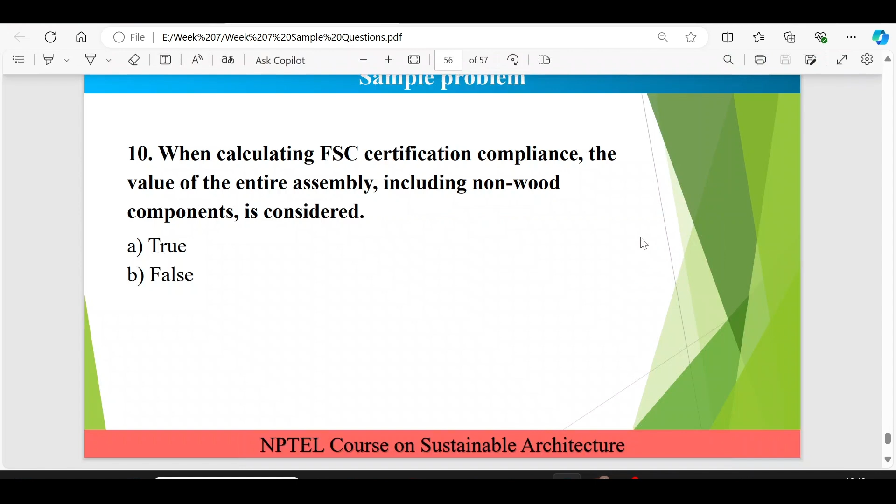So with this, we will be ending the sample question discussions. Now we will be moving to these previous year assignment questions, and I will be discussing these questions one by one, assuming all of you have now understood and revised the videos and content.

Try to give answers to these questions correctly in the chat box, one by one. Here is the first question: one of the methods of reducing waste at source is by adoption of industrial standards for product manufacturing and packaging that use less materials. Is this correct or incorrect?

Correct, sir, okay. All of you have marked the right answer. It is correct only. Whenever you adopt industrial standards that use fewer materials in product manufacturing and packaging, that helps reduce waste at the source, making it the key method for waste reduction. So this statement is true.

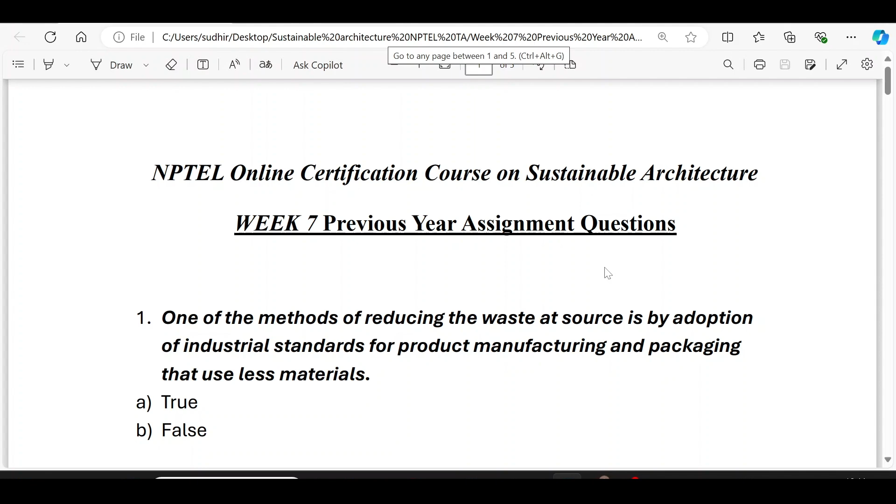Let's move to question second. Try to give answer to this question: arrange the following in the hierarchy of integrated solid waste management, first step to last step. Which option will be correct?

Second, BCA. Option 2. I think all of you are going in the right direction and are able to answer these questions that were asked in the previous year. Option 2, that is BCA, is the right answer.

The hierarchy of integrated solid waste management typically starts with waste minimization, also referred to as reducing waste generation, followed by waste segregation, that is sorting waste into different types, and ends with waste treatment and disposal, referred to as processing and disposing of the waste. So option second, BCA, is the right arrangement.

Let's move to question number 3: anaerobic digestion and biomethanation are technologies used to process which kind of waste? Organic.

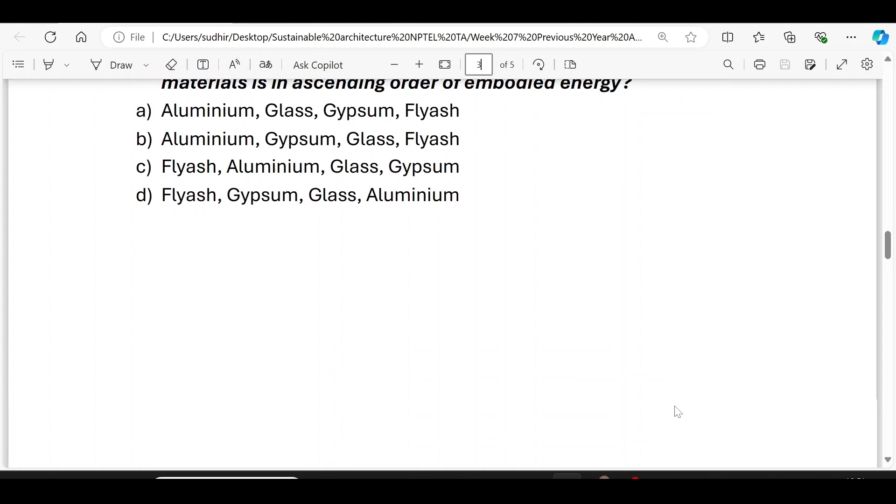Let's move to the sixth question. Although retrofitting an existing building to accommodate a new program can add to the cost and complexity of design, reuse of existing components can reduce the overall cost of construction sustainably. Is this true or false?

Okay, so this statement is true, and all of you have answered it correctly. While retrofitting can be complex and costly, reusing existing components often results in overall cost savings and resource efficiency. Let's move to the next question.

Question number 7. If broken glass waste from home is sent back to industry for recycling, then this glass reused in the manufacturing of new glass is termed as...

This concept, this discussion, I think I have made. This type of question we have already discussed in the sample questions. Am I right? Yes, sir. So all of you have answered it correctly. This was also asked in the previous year. So it is post-consumer recycled content. Let's move to the next question.

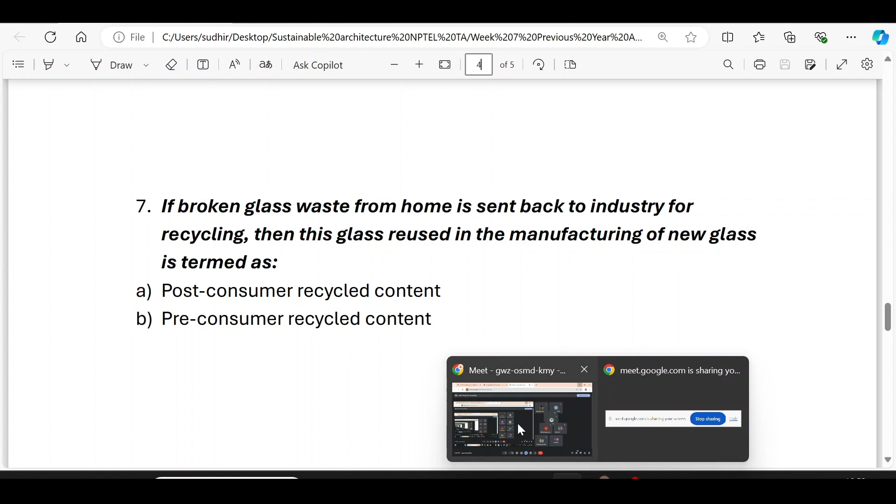It is post-consumer because the broken glass is there and it is sent back to the industry for recycling. So it is once used by the consumer, so it is post-consumer. All of you have answered A only, so I think it is fine. Are you fine, Elena? Yeah, so it is option A, post-consumer.

So here is question number 8. FSC certification is only given to forest products.

So I think all of you are now going in the right direction and giving the right answer to all the questions. So it is true. FSC stands for Forest Stewardship Council, as we have discussed. That certification is specifically for forest products, ensuring they come from responsibly managed forests. So it is true. Can we move to the next question?

Yes, sir. Here is the ninth question of the previous year. Which of the following is not a rapidly renewable material? Bamboo, straw bales, plywood, wool carpet.